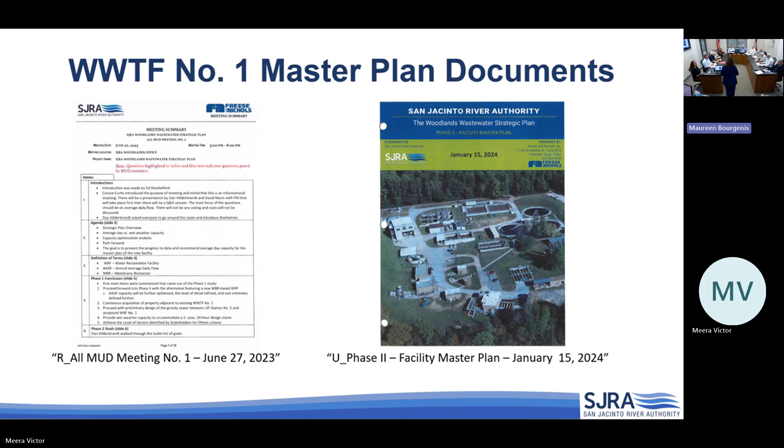The second document that I think is of note is document U on that USB. It's the phase two facility master plan from January 15th, 2024 from Freese and Nichols. So those two documents, once again, are on your USB. I'm not necessarily going to reference them directly, but there's a lot of information I think that can help answer some of the questions that are within those two documents. So as we move forward this evening, once again, hopefully this is some information that is familiar to you. And for those that are newer MUD directors that maybe came in 2024, this is maybe the first time you're hearing it live, but it is some information that has been presented before.

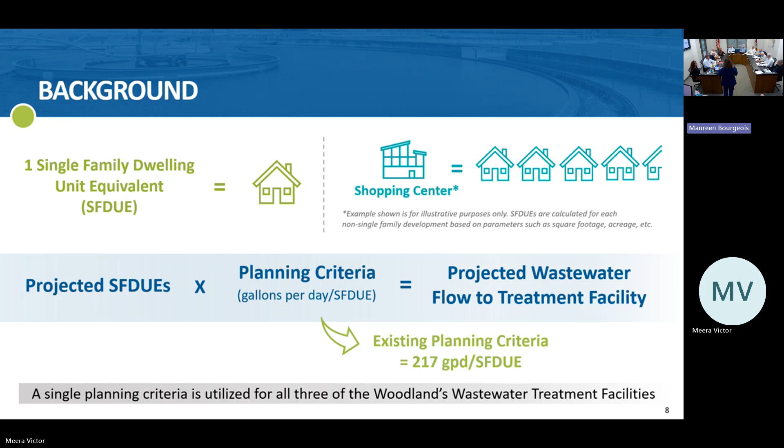Y'all as trustees are very aware what an SFDUE is, and so it's one single family unit, and that can be equivalent to more of that if you're in a commercial development. The way that you project the wastewater flow is projected SFDUEs by the planning criteria. The current and existing planning criteria is 217 gallons per day per SFDUE, so that's what's been approved. Just for note, there is one single planning criteria. We use 217 gallons per day per SFDUE for the whole of the Woodlands. So it's not broken up by different basin. And that'll be an important thing to note as we move forward. But once again, you take one SFDUE times 217. And so for one SFDUE, it would be 217 gallons per day. That's the way the math works out.

What Freese and Nichols went and did was utilize the latest annual SFDUE. Like I said, they worked specifically and directly, with authorization from Woodlands Water, with HARC to make sure that all of the data was consistent. The 6th and final accounting was completed in 2017. Things changed in between. HARC was adjusting as they were going, as well as things were changing on the ground. So in late 2022, they updated the information to the most recent information at that time.

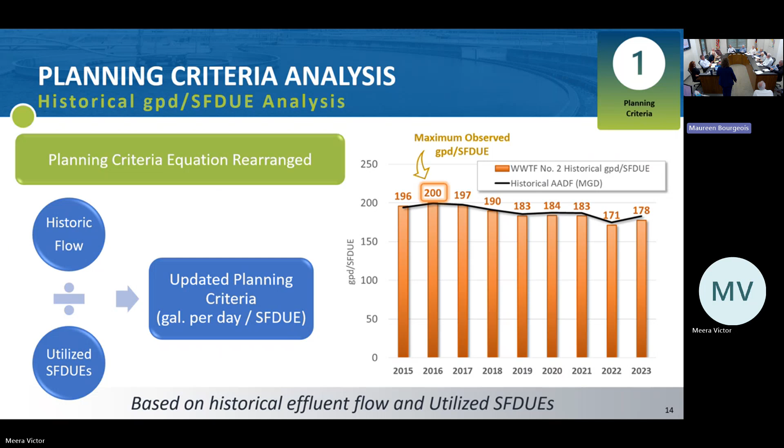We did that for both plant 2 and plant 1 because they're the major contributing plants in The Woodlands. And when we look at it, it's actually 200 gallons per day per unit at plant 2, and it's 191 at plant 1. Since we use one planning criteria for all of The Woodlands, we want to be conservative, and we're going to go with that maximum from plant 2, which is 200 gallons per day. So we take 217 and we lower it to 200.

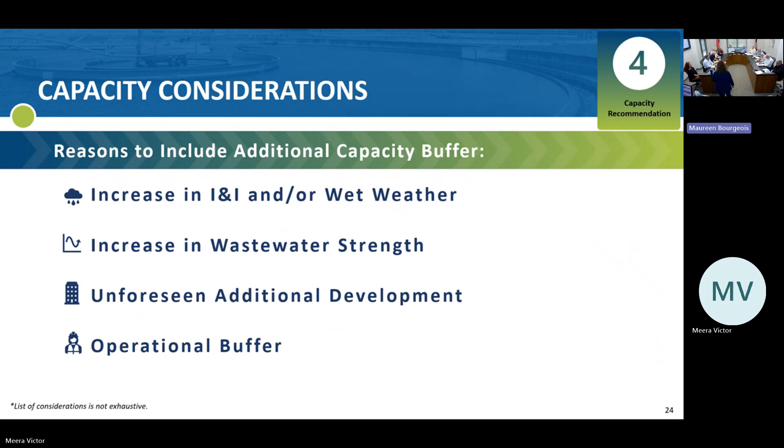Reasons why you would want to include it: we know about I&I, right? The peaks that come through. Increase in wastewater strength, we'll talk about that a little bit, but these are different reasons that cities may want to have a buffer. Unforeseen additional development, and then operational buffer, which we'll talk about as well. So what Freese and Nichols did was they analyzed these 4 different things. And so I'm going to start at the top and work my way down.

An increase in I&I. Essentially what they did was they looked at 2 different neighborhoods in the Woodlands, one that was newer, one that was older, and said, okay, if we didn't spend the money on the newer section and it got as bad as what the other section is, how much would we think that that could increase across the board? And that was around a 16% buffer that you might want to consider.

When it comes to wastewater strength for treatment facility 1, when you're sizing capacity, the loading of the influent, let's just say how dirty it is when it comes in versus how clean you need to make it to take it out, not a ton different that we would anticipate given the makeup. So we would say there's a negligible buffer needed for wastewater strength.

Additional development: what Freese and Nichols noted was from a 2016 to 2023 timeframe, there was basically a 10% increase of development projection in that time. So if we see that same 10% increase again that we can't expect, then we want to make sure we have a buffer. And then an operational buffer for unused treatment capacity. Once again, that's 17% from the other municipalities. That's a good comparative of what to have.

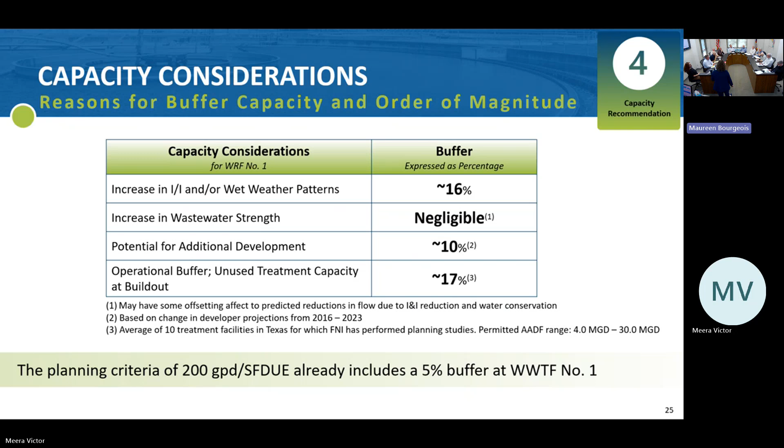So what I want to point out is these are not cumulative. We're not saying go 16 plus 10 plus 17. These are ranges that you would want to consider for things that you can't predict. These are things that we're not sure about, but we want to make sure that we have some level of comfort for. And once again, the planning criteria is 200, and that includes a 5% buffer for treatment plant 1. If we were looking at treatment plant 2, there would be 0 buffer, right?

So with that being said, the capacity projection and recommendation from Freese and Nichols was 7 million gallons per day. And to note, that's a 0.8 MGD reduction from your current permit capacity, right? I think many of you know that currently the permit's 7.8. We're recommending to drop it to 7 with the change in planning criteria to 200 gallons per day per SFDUE.

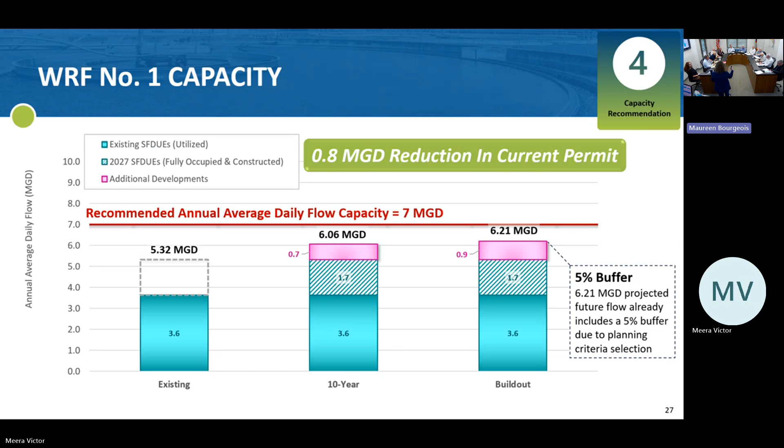So with that, there's a built-in 5% buffer between the 191 and the 200. And then there's an 11% additional buffer. So if you take the 5% plus the 11, that's 16%, which is in that range of 17% on average for the other municipalities that we would compare ourselves to. And so from an operational perspective and an unknowns perspective, we would say that that is a good planning adjustment to make.

It's a good planning plan to have. I want to note, because if you're like me and I was walking through this trying to do the math, I added up the 6.21, and then I said, okay, 11% on top of that, so it's 6.21 times 1.11. That's not how you do the 11% buffer math.

So you take the 7 MGD and multiply by 0.11, then subtract that from the 7 MGD, and that's the 11%. Then you add that number to the 6.21. I'll show you a different way to do the math here in a second, but I wanted you to note that.

Something I want to drive home is, if we were looking at this without a change in planning criteria - there's really two things we've changed so far: the 217 dropping to 200, and the 25% buffer down to 11%.

If we were to use the same SFDUEs, which we have not changed, that would be a 9 MGD plant. So what we've provided instead is a proposal to drop the planning criteria to 200 gallons per day per SFDUE, because that's calibrated to what we're seeing historically in your system.

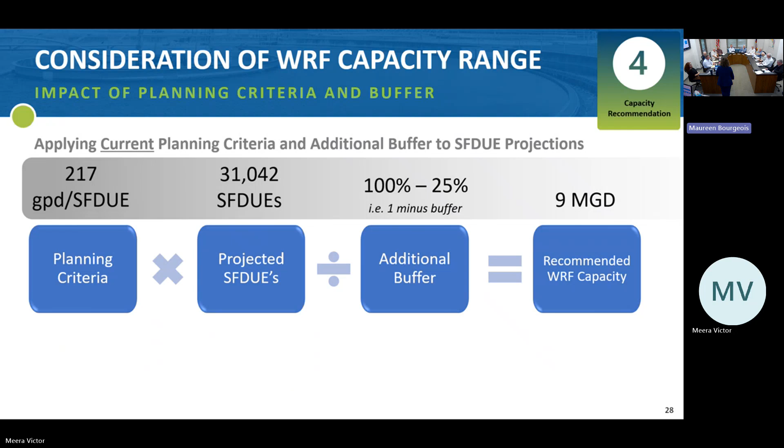But that is essentially the conclusion that Freese gave at the end of this: proceed forward with the master planning based on an annual average capacity of 7 MGD, and then continue to look for cost savings opportunities during design, which is still a recommendation you see today.

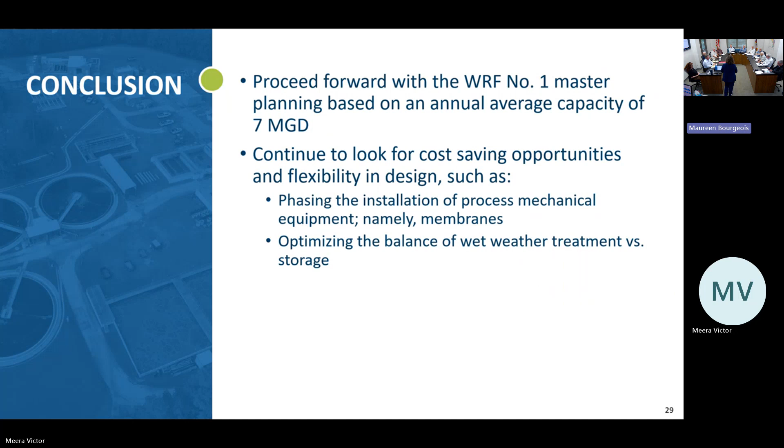There's conversations we're having right now about phasing of process mechanical and optimizing the wet weather versus storage. These are things we've been talking about and acknowledge we need to continue to move forward with. So with that, I am opening the floor to any questions you all have.

Yes, Mr. Maggart. Since I had the questions about the SFDUs, let me ask you a couple of questions. What's the conversion from one SFDU to a hotel? What do you use for the conversion to get that? I don't know. Okay, let me ask you another one - what about a hotel?

No, that's fine. Anybody in the audience? He has it. No, I don't. I just want to know if they know it. Here's the table. Anyway, anybody in the audience, that's okay. Yeah, so that's my first question.

Okay, now, I'm speaking because I just got elected again. Yes, sir. And I've only been here a year, so I went to this presentation. If you'll put this back up on the screen. Yes, sir. So this is the management presentation that I saw.

So anyway, the net result is that you got 3.6 of baseline usage. That's, you converted SFDUs to current SFDUs to GPM, right? MGD. Yes, sir. So that's at 200.

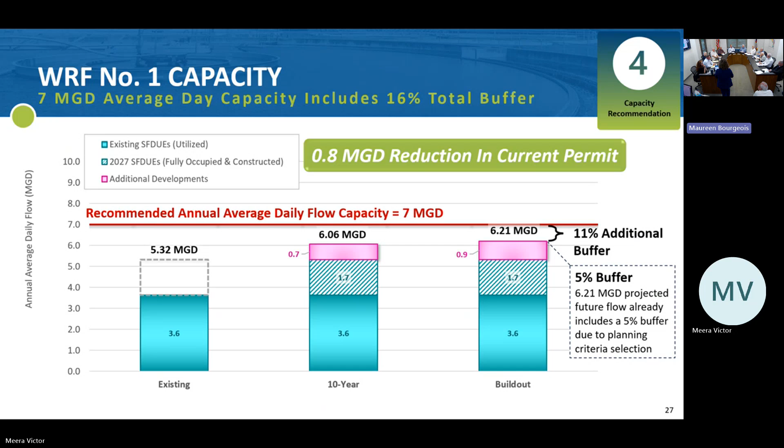At 200, yes sir. No, so 3.6 is measured - it's not converted, it's not an estimated number. No, it's 3.6 based on 200 times SFDs. No, that's the measured flow. They have the total SF, it's existing, from that exhibit right there, apparently. They converted that, divided by 200, I think.

Right? No, that's true. Anyway, I just went back, I got all the data from the last year that throughput that's presented to the TCEQ for the last year, starting in April 24.

For the last year, the average throughput is a little over 3.07, not 3.6. So the point is, if you look at the black line for the SFDUs, it's declining. So why would you take 3.6? That's a big chunk, half of 0.5 MGD that you're including forever when you've got this history that it's been declining for the last 8 or 10 years. So my question is why do you continue to use 3.6 when we know you've gone from 191 to 170 in the last 10 years based on sold SFDUs?

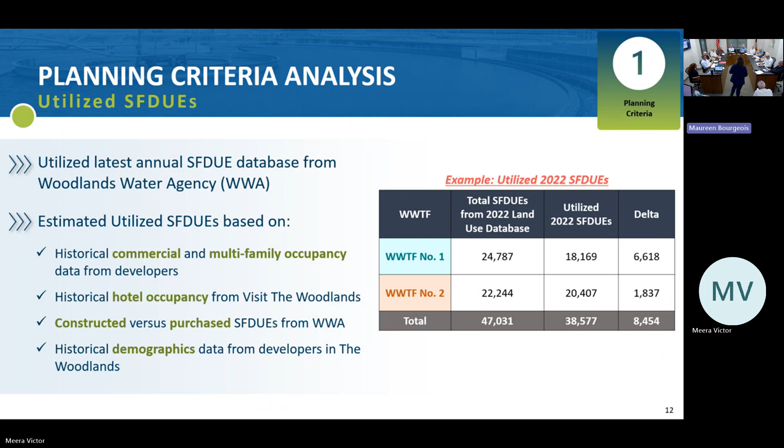You know, we stand behind these Freese studies. Yes sir, we do. And the fact is, make sure, no I agree. And so I keep using the name - you keep, nope.

So I want y'all to understand that there is some information that was in a direct non-disclosure agreement between Freese and Howard Hughes that we as the River Authority do not have access to. Particularly on the pink, I don't have that information, but we have been on the phone with Freese and Nichols over the last couple days so I can make sure to give this presentation as correctly and consistently as possible. I didn't have that data point to rattle off to you all, so I apologize for not having that, Brad. But if David Munn said that, and that's a note from that meeting, I believe that that is true.

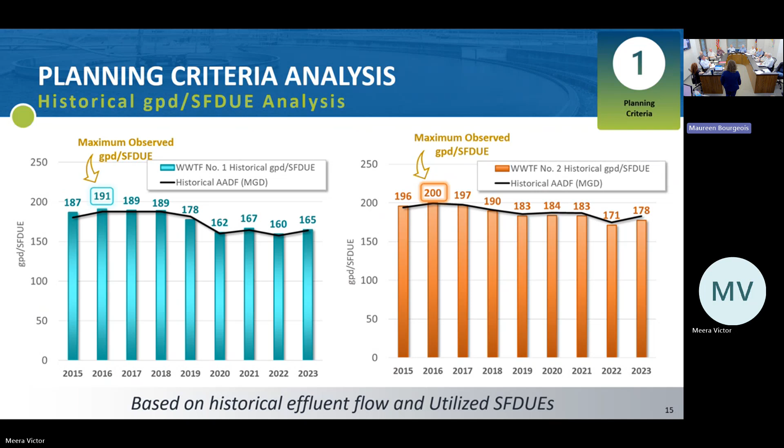Okay, so we have to maybe reconcile that whole picture of SFDUE count as well as the gallons per day for each SFDUE. And that just gets us to the teal color. Then there's the magic pink color, which is based on information that you all haven't been able to really assess because that was under an NDA between Howard Hughes Corporation and Freese and Nichols.

So maybe we can unpack that with Howard Hughes and really understand what that was. Was the Ritz-Carlton planned in that? That's kind of a new thing on a little tiny piece of land. That's going to be a lot of SFDUEs, I think, right? So maybe that wasn't in the plan 5 years ago. It certainly is today. So it makes sense to me that we'd want to have the right size plant.

And then, to your point, maybe we have a plant that can do that and get us through the next 20 or 30 years. That's good. The other evaluation is, is this the plant to take us through the next 50 years? That's kind of the second part of our topic, probably, at the end of the day, answering that question as well.

First part, we can't do anything until we get this first part figured out, I don't think, and let you have the real data to then go do the analysis that we need. You know, let me get back to this 1.7. There's two pieces here apparently. Purchased SFDUs, that's one piece, and then currently constructed and not occupied.

Sorry, now what was that, Mr. Mayor? I said this crosshatch area is a big number, 1.7. Yes, sir. It says purchased. And then it's got in parentheses, I assume purchased, which I agree with. That's everybody in every MUD is purchased. And then we've got this in parentheses, this wild card number. And we find out what is purchased, just purchased and not used.

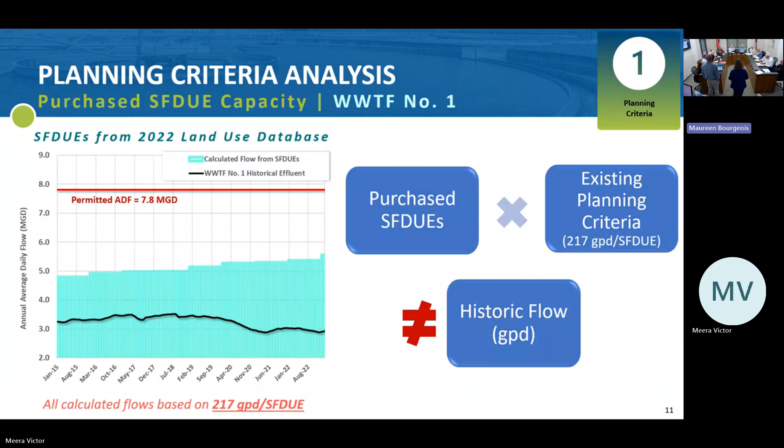But let me ask you a question. Is Howard Hughes aware, Chris, the north part of town center, their wastewater goes to Shenandoah, right? North part of town center. I'm talking about there's monuments all on Six Pines, on Pinecroft, it says City of Shenandoah, everything north of there. Yeah, there's parts of it. Right, that all goes to Shenandoah's waste. St. Luke's does go to MUD 39, but it's carved out. But a lot of people aren't aware that the north part of town center doesn't even go to the MUDs. I don't know whether Howard Hughes knows that.

But there's a bunch of vacant land on Research Forest that's gonna go to Shenandoah. It's in the Woodlands, but it's going to Shenandoah eventually. You can see on the map the little cutouts. So if you look just north of the green, below the orange, there's this big cutout where Memorial Hermann is and a lot of acreage. And so that's the area. No, I understand. But if you look throughout the map, you'll see those little cutout blocks, and those are all the out tracts that are not served by the MUDs.

Right, I understand. But I just want to make sure, a lot of people don't know that Shenandoah services part of town center. And there's some vacant land over there, and hopefully Howard Hughes, when they were putting out this number, didn't include that. And that's why I asked for that list. I'd like to see the land use map, as I sent in that email, of where all those out tracts are. And I'm finished with SFDUEs. If you want to talk about the plant.

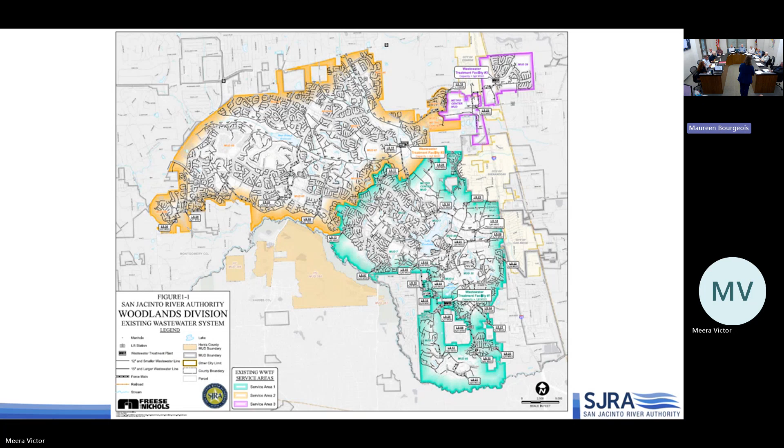Eight years ago, before wastewater plant 2 was expanded, plant 2 had a small plant with a lift station there. Most of the flow would go to that lift station and go over to wastewater plant 1. Over the years, plant 2 was expanded. We never really used that lift station anymore because it was just a transfer lift station. And so that lift station's been decommissioned and the force main itself has been cut in pieces because it was exposed. Oh, okay. So they're independent now. They're completely independent, 100%. That's what I wanted clarification on. Okay, thank you. I had two questions. Yes, sir. Comments, requests. If you go back to the flows or the SFDUEs, doesn't matter which one.

So I had a simple request there. That's good. So, okay, the 8430, could I see a breakdown of that by MUD? I think what we have is by service area units, and when I get that information, we'll break it out the best that we can. By MUD and by wastewater treatment plant. Yeah, we have a breakdown, I already have a breakdown by MUD, but we don't know where they go. Right, so that data is something that we've requested so that we can get that and then try to get it in the format that you've requested.

I'm where Kent is, that you look at the existing, I just don't see how we get to 10-year and build out with the land we have. Understood. That number just seems too much for what we've got available. And now if you go back to the multi-year, yeah, that one. Okay. So one of the things I asked for was if you could update this to the current most recent flow rate and show what's going on. Because this shows a pretty significant drop, and we're still showing quite a bit under the 200.

We're talking about spending $300 million based upon an estimate that's at best a couple of years old. One of the advantages we have, every year we can delay this decision, the better we come to knowing the full ultimate capacity for the Woodlands. Okay? So this would say 3.1 is about where I need to be. And you're designing for 7. I understand, the historical is what we use to calibrate. But as an engineer, you know the best thing to do is to use data when you have data and use assumptions when you don't have data. We also have data that is a contract that requires that we provide a certain capacity to you all. So unless y'all choose to revise that down, we have to provide greater than this.

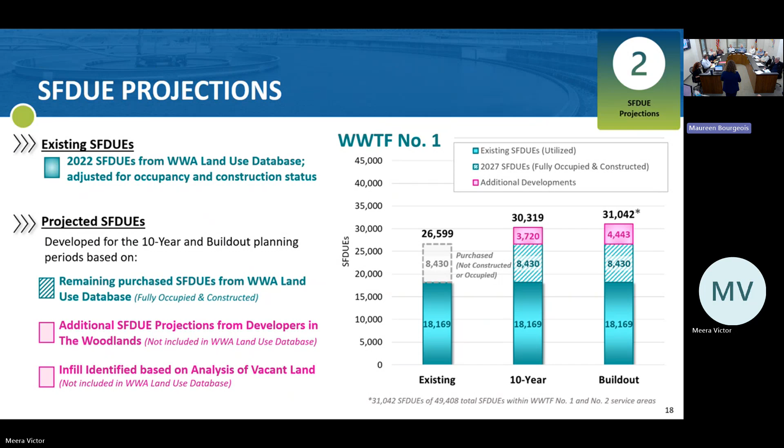So the question is, we did this study. We worked through, got the best information that we had at the time, in 2022, and we spent money. So for us to update this, we would have to hire an engineer to come through and do it again, and we would need direction from the trustees to do that. Wait a minute. We need to hire an engineer? Come on. If you can't update this chart yourself, I'll be happy to update it for you. You tried to volunteer once before, it didn't get you. Yeah.

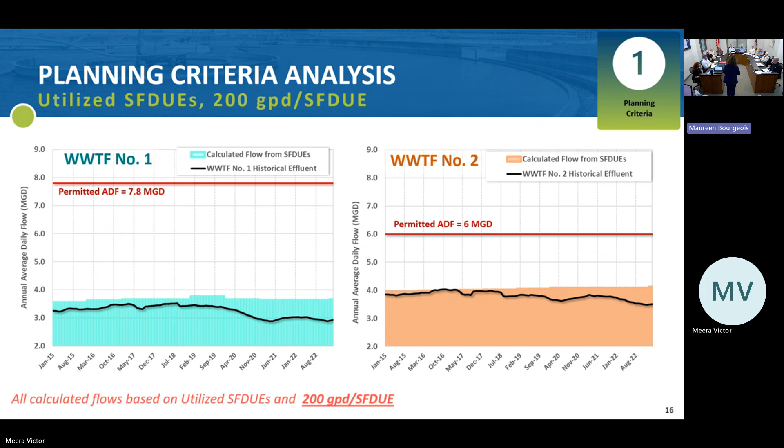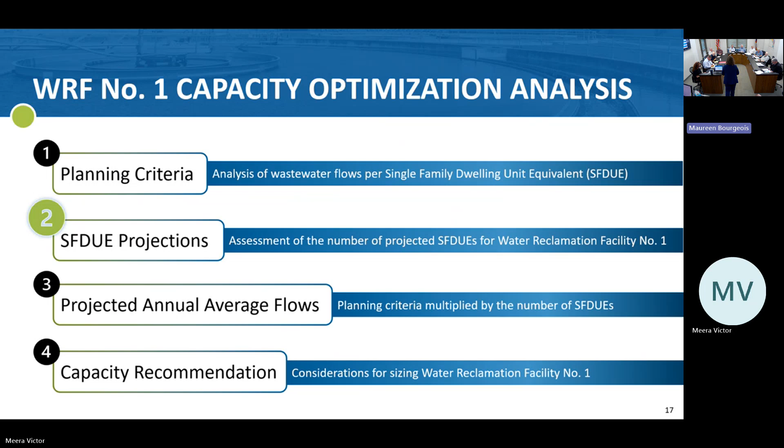All right, any other questions here? I think we've got the matrix of all the questions that we've gotten in y'all's email that we are going to be responding back to you all with. There were a lot of questions, and so we wanted to make sure that we were taking the time to get that back to you and be mindful and thoughtful with the responses and not be rushed. But with that, I'm going to go ahead and pass it over to Meera. So, Meera, you're up.

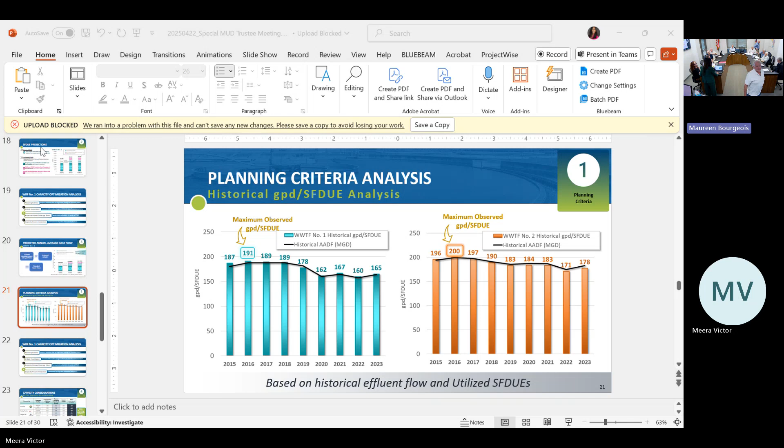Very professional. You didn't copyright that, did you? Can I use that? Good question. Bio break.